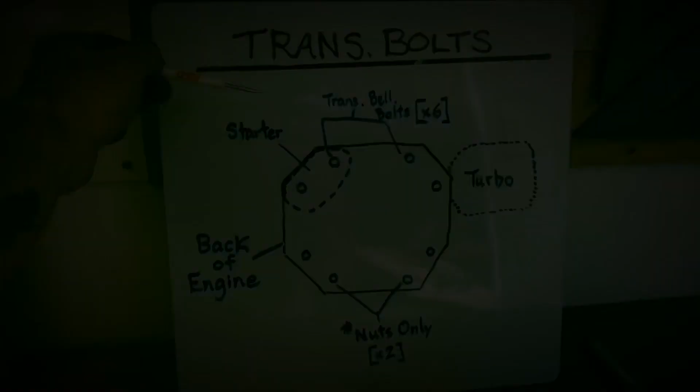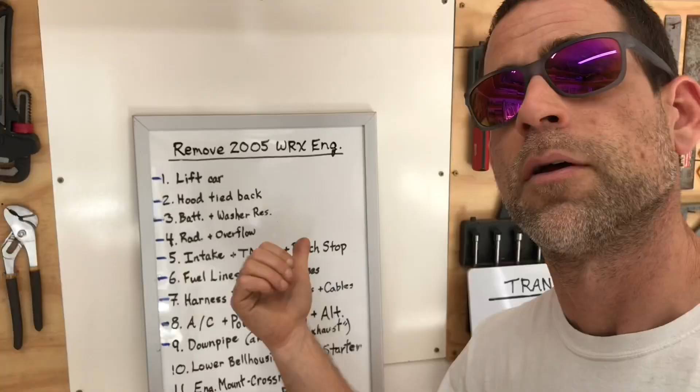Now before we dive into removing these bell housing bolts, I want to let you guys know that this video is actually a video in a build series where I'm removing a 2005 WRX engine from a 1998 two-door coupe. Throughout this build series, we've been referencing this build list behind me where I'm walking through 16 steps that I'm taking to remove this 2005 WRX engine.

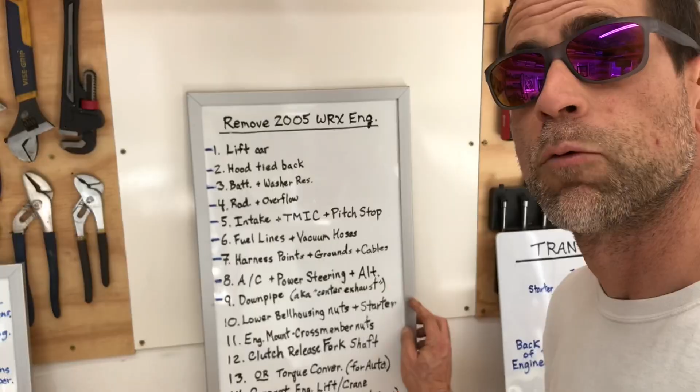So far we've walked through the first 9 steps and we're on step 10, which is to remove the lower bell housing nuts and the starter. But in this video, I'm actually going to walk you guys through how to remove all 8 of those nuts and bolts. There's actually 6 bolts you're going to need to remove and 2 nuts.

Before we head out to the car, let's take a closer look at this figure on the whiteboard so we can get a better idea of what we're going to be doing today.

Okay, here's the figure I've put together. You can see I have the starter on the left side, I have the turbo on the right side, and I have transmission bell housing bolts called out right here in the middle. There's actually going to be 6 of those bolts. And then over here, I'm pointing out that this is the back of the engine, of course.

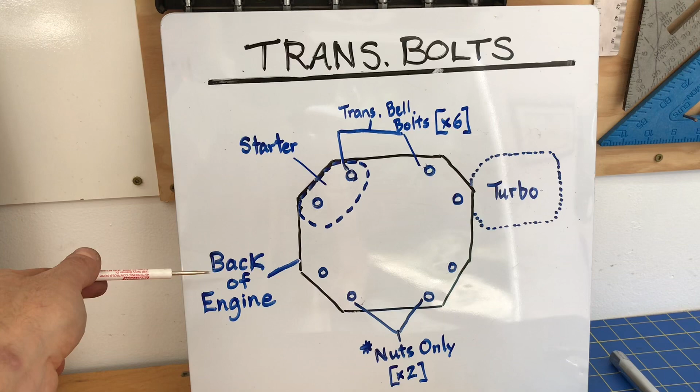And down here, you only have to remove nuts. And that's because these lower ones are actually studs on the engine. So all you have to do is remove the 2 nuts. So that's basically it. You have 6 bolts to remove, and you have 2 lower nuts to remove. Oftentimes, those nuts are the trickiest. So I'm going to walk you guys through the steps and the tools I use to get those out.

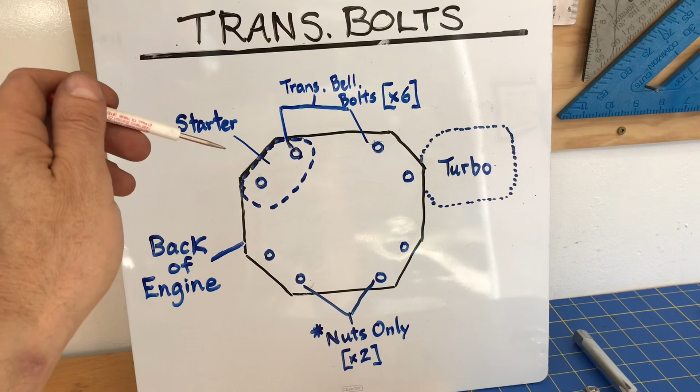Okay, let's head out to the car and take a closer look at what I'm trying to show in this figure. That way, you can connect what you're seeing in this figure to the actual parts in the car.

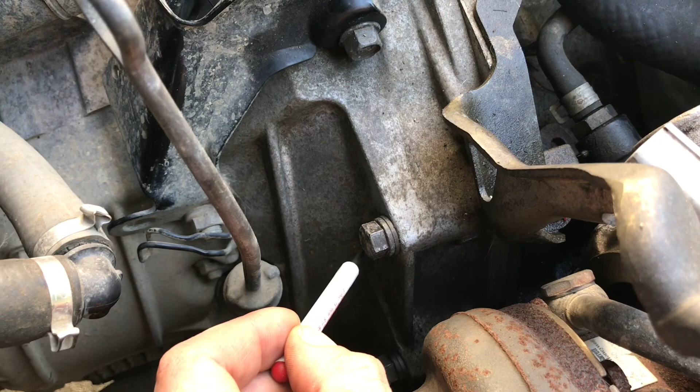Okay, I'm showing you a view from the rear of the engine on the passenger side. Right here at the bottom of the screen is a turbo. And if you'll remember on that figure, right next to that turbo, there's actually going to be 2 bolts on the transmission bell housing that you're going to have to remove. The first of those 2 bolts is this one right here, and that's one of the easiest ones to get at. And then immediately below it, about 3 or 4 inches, is the second bolt.

That bolt is also relatively easy to get at. You can actually get this one with a socket and a short extension and use your ratchet. Both these bolts, right to the left of the turbo, are really easy to get at, but I actually loosen and leave this bolt in up until the very end. This is the bolt that I actually use to hold the engine transmission together till the very end when the engine's all put up in the hoist. So all we're going to do is loosen this bolt. We're not actually going to pull it all the way out.

All these bolts and the 2 nuts on the bottom are going to be 14mm. But I'm going to walk you guys through which 14mm ratchet, socket, or open-end wrench combination I use for each one of these bolts. That's going to make the process a hell of a lot easier for you.

Okay, now we're back in the shop, and hopefully what I've drawn on this figure makes a little more sense. We have to remove 6 of those transmission bell housing bolts, and then remove those 2 nuts on the bottom.

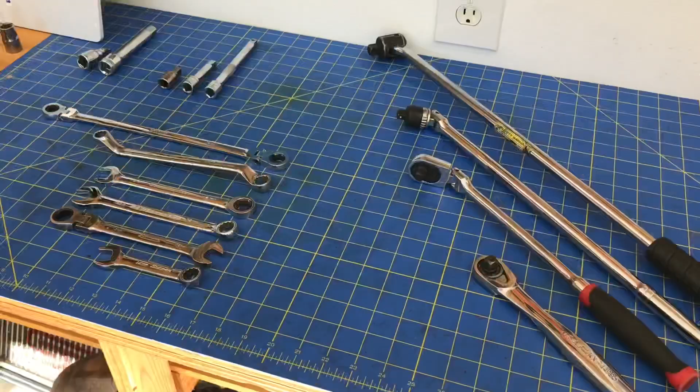Now the tools I'm going to recommend for removing these bolts and nuts are over here on my workbench. First off, I'm not telling you that you need to use all these tools. I'm showing you all the different tools you could use to remove a 14mm nut and bolt. These are all the different types I've tried, and I'll tell you right now, they definitely don't all work. On the right side, I've got a bunch of ratchets going from a normal 3/8 size all the way to a big breaker bar with a 1/2 inch size. Even though it'd be nice, this big 1/2 inch breaker bar just won't fit in a lot of the tight spots in this engine compartment.

I actually end up using this extended 3/8 ratchet with a pivoting head. So let's grab that sucker and put that aside. We'll definitely be using that guy.

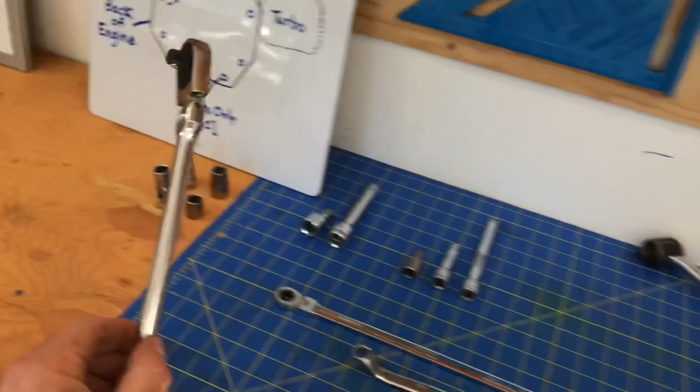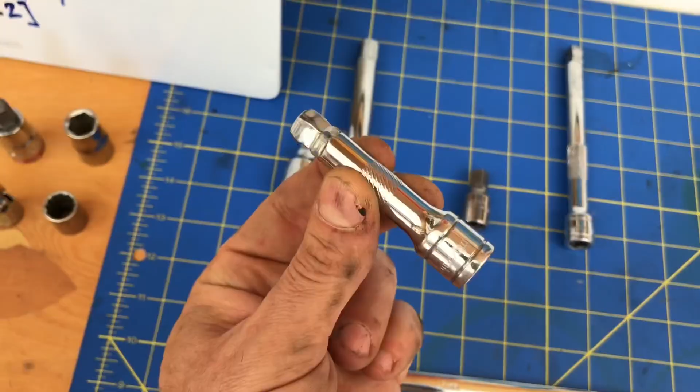Over here on the upper left, I have a bunch of extensions - 1/2 inch extensions, 3/8 extensions. I really only need 1, and that's going to be this middle size 3/8 extension. So grab that short, basic 3/8 extension, that should be all you really need. Then grab a 14mm socket.

Okay, and then I have all these wrenches. I've got a bunch of different ratcheting and non-ratcheting, box-ended and open-ended wrenches, going from a short, stubby, snap-on sucker to a pivoting, ratcheting box-ended sucker that I've used for a lot of the applications on this engine removal, to a wide assortment, all the way up to this badass, long, ratcheting box-ended wrench. This one's great to use, but unfortunately it's a little too long for most of those tight spots on this Subaru engine.

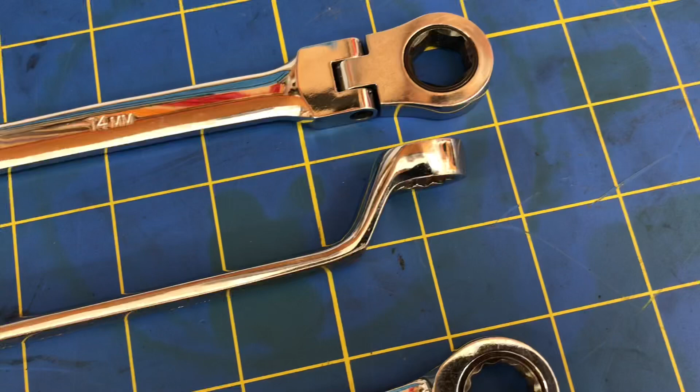So again, I can't quite use the longest one. I go to the next size down. This guy's great - it's an offset box-ended wrench with a really small body around the end, so it can get in those tight spots. It's got a 14mm on one side and 12mm on the other, and it's offset, so it works great to get up inside around that nut so you can loosen it. This is definitely one of my go-to wrenches, and I take it anytime I go racing. So let's grab that sucker too.

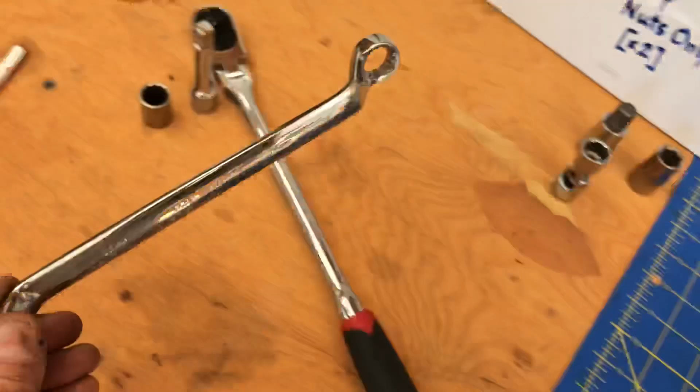Alright, we've got our tools, and to be honest, these are really the only tools I ever need to remove these bell housing bolts and those lower nuts. So let's head up to the car and start removing some nuts and bolts.

Okay, starting on the upper passenger side, let's go ahead and loosen this one first. To loosen this sucker, you're actually going to want to remove the transmission dipstick. Get that out of the way, there's no reason to have it there. It's also a good idea to plug that or put a rag over it. But now that the dipstick is removed, you can get this bolt really easily.

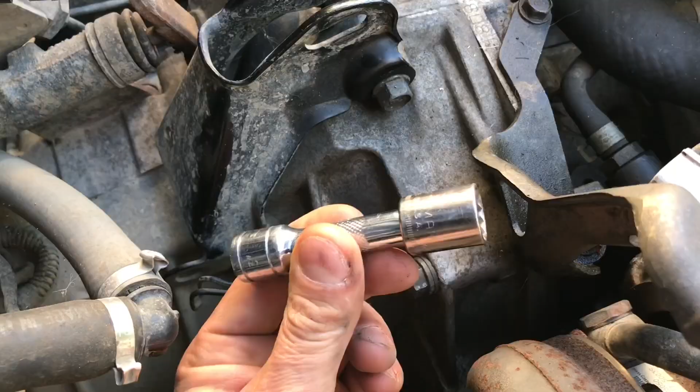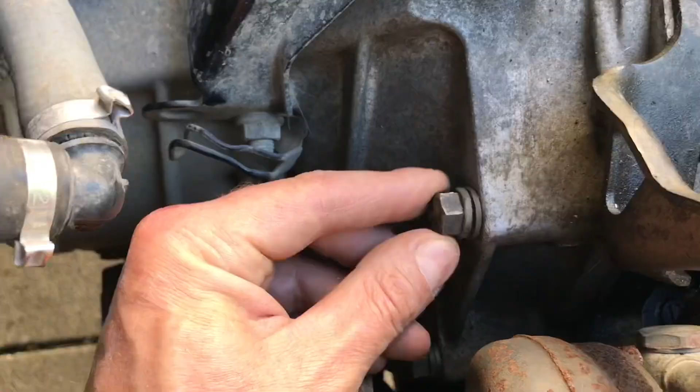So grab that short extension and the 14mm socket, throw it on with a ratchet, and loosen that bolt. Remember, I'm going to leave this bolt in until the very end. Okay, that bolt's loose, so thread it in hand tight and just leave it like that for now.

Now for the next bolt, that's the one right below it, 3 or 4 inches, to the left of the turbo. Your socket and ratchet should work there, no problem. This bolt we can go ahead and remove all the way and pull it on out. Alright, we got the first bolt down of 6.

Okay, moving down to that bottom bolt on the passenger side, you should be able to get that short extension with a socket on that bolt as well. Okay, you can go ahead and take this bolt all the way out as well. That's the second bolt of 6. These are coming out really easily.

Next, I'll move down to this lower nut. This one's a pain in the butt because you can't put a socket and extension on it, since it's right behind that CV right here. So how do you get that off? That offset box-ended wrench works perfect for this nut. Grab that offset box-ended wrench, put it over that nut, and then go ahead and loosen that sucker.

You've already soaked it with penetrating compound, so it shouldn't be too difficult. If your box-ended wrench has a decent length to it, you should be able to apply enough force to get that sucker loosened.

Okay, go ahead and take this nut all the way off. And bam, we got one of our 2 nuts off.

Time to move over to the driver's side. Now we've moved over to the driver's side on the rear of the engine, and we're going to remove these upper 2 transmission bell housing bolts. These bolts actually serve 2 purposes - they hold your starter in place, and they're holding your transmission to your engine. We're going to remove both these bolts and take them out completely.

That short extension with a 14mm socket should work perfect. And then go ahead and remove that bolt completely.

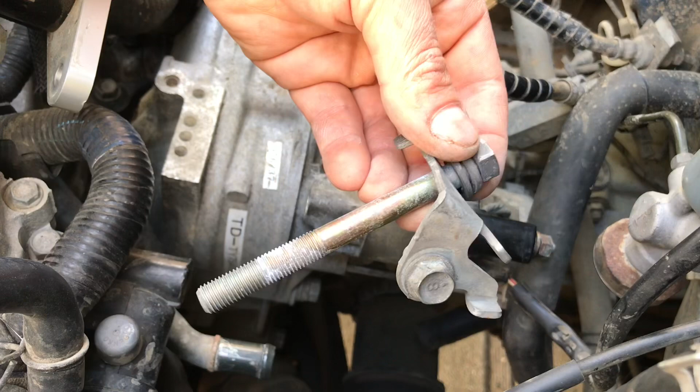Now keep track of that bolt and that separate little ground terminal connection. A lot of times that bolt is actually a little bit longer than the other bell housing bolts, so make sure you put that bolt back in the same location.

Then move on to that lower bolt right below the starter. For this bolt, having a ratchet that has one of those pivot heads really makes it a lot easier. I definitely recommend you get one of these and add it to your tool chest.

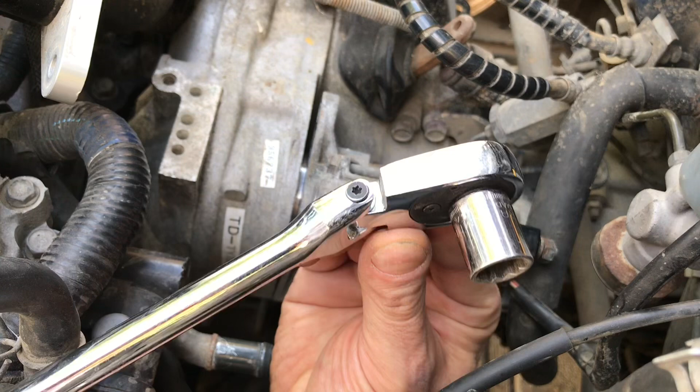Now that we've loosened it, you can actually see that the starter is starting to separate from that transmission bell housing. Sometimes this bolt can get a little bit bound up on the weight of the starter, so go ahead and hold the weight of that starter with the other hand. That way you can loosen that bolt and take it all the way out.

Okay, one more bolt out, and we can go ahead and remove the starter as well.

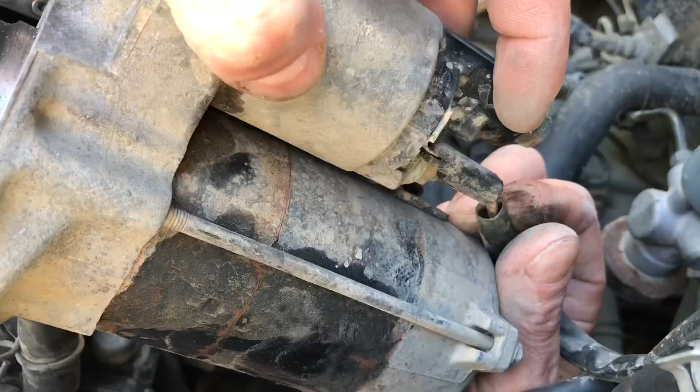Don't forget to remove all those little electrical connections from that starter. Looks like there's one more that I had forgotten to disconnect. And then go ahead and take that starter and store it with all the rest of your parts. Ah, bam, I'll put it right there.

Okay, now we're going to move on to the last bolt on the driver's side down here towards the bottom. You should be able to get a socket and a ratchet on that sucker. And then go ahead and take that bolt all the way out. Bam, that's the last bolt.

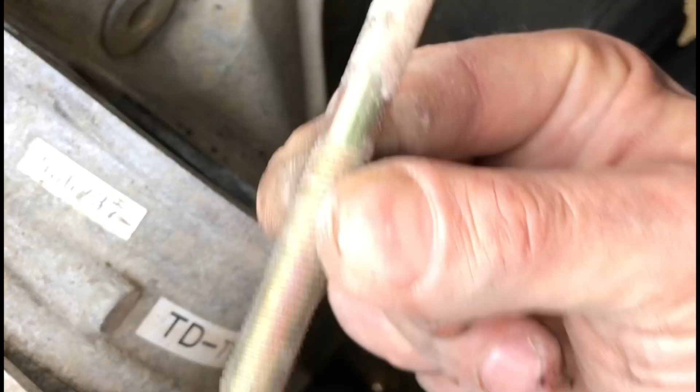We actually left one bolt in, but it's already loosened, and that one's just in there for safety while we lift this engine. So we've actually taken care of all 6 of these bolts.

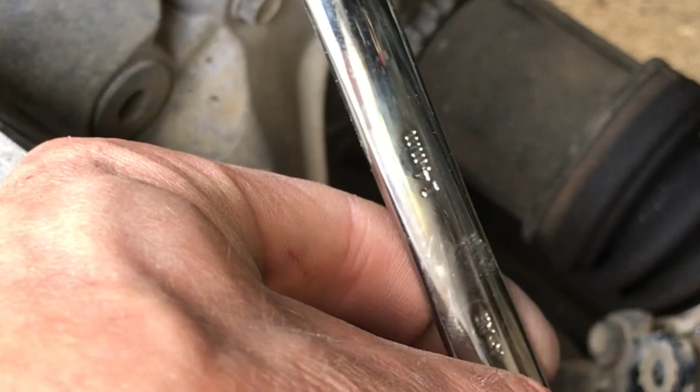Now we just have to move on to that last nut, and this engine is pretty much completely disconnected from this transmission. Like we did on the other side, for this bottom nut, I like to use that offset 14mm box-ended wrench. And remember, if that sucker's tight, make sure you soak it with some penetrating compound.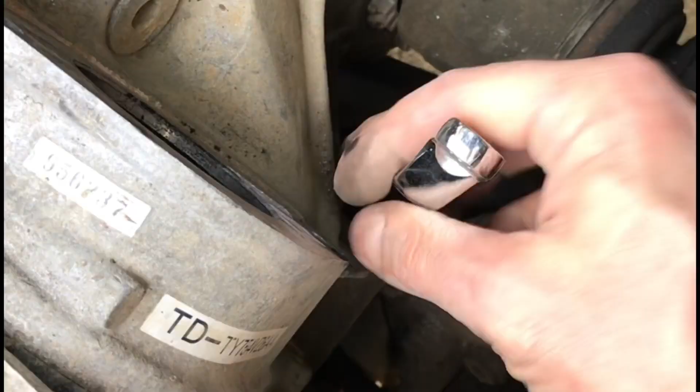Okay, bam, that's the second bottom nut, and we are all done. This engine is pretty much completely unbolted from this transmission.

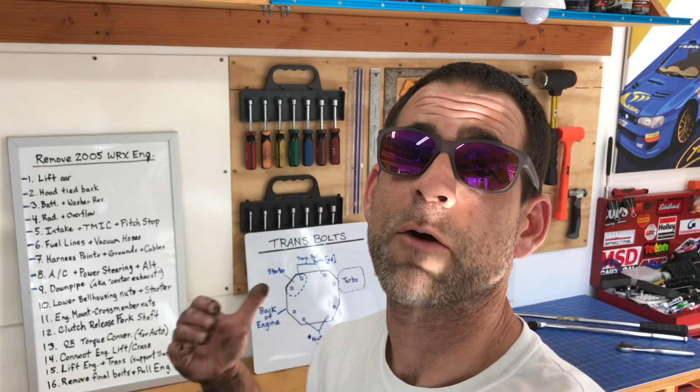Alright guys, and just like that, we are done with another step off this master list, and we are one step closer to getting this engine out of this car. So let's head over to that master list and mark this one off.

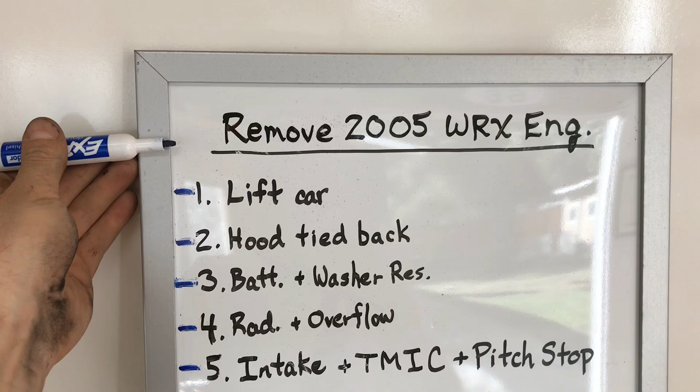Here's that master list for removing that 2005 WRX engine from my 1998 two-door coupe. We've worked our way down this master list, and we're all the way down here to number 10, the lower bell housing nuts and the starter. We've completed that step, so I'm going to mark it off the list.

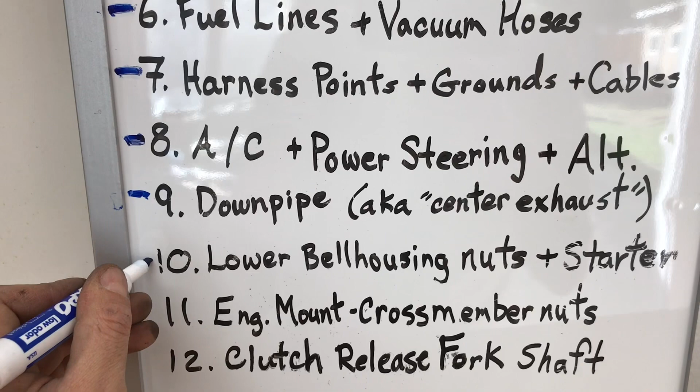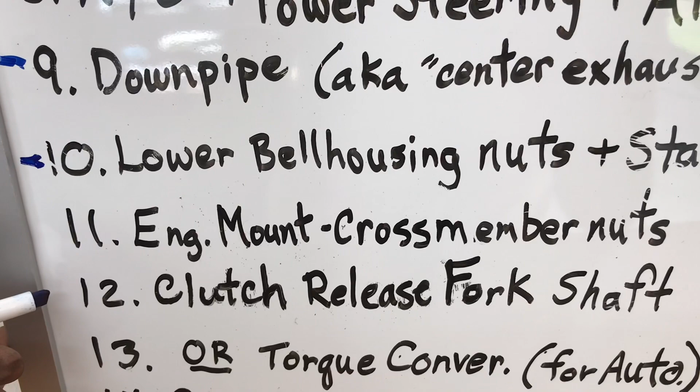Bam. The next one on the list is the engine mount crossmember nuts. That one's a really easy step. And then we'll jump down here to step number 12, the clutch release fork shaft. That's something you gotta remove, and it's a hurdle for some people, but I'm gonna walk you guys through the steps. It's not too difficult once you've seen it done.

We'll walk through those 2 steps in the next video. But for now, I'm going to wrap it up there for today, guys.